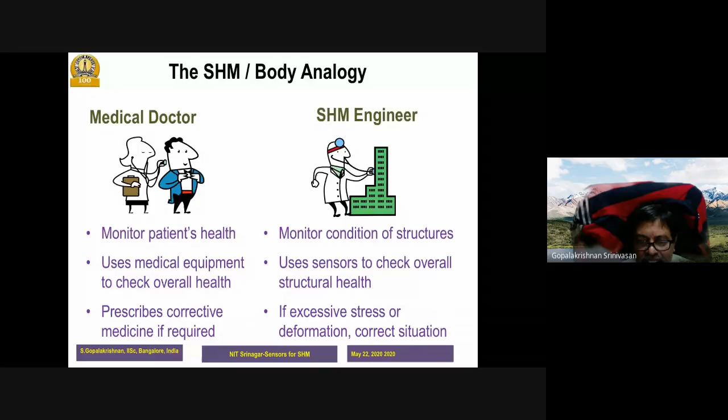And if there is excessive stress or deformation, because of which cracks will form, we will prescribe some corrective actions and do some repairs if possible, or change the structure, change the monitoring condition, change the stiffness of the structure, do whatever to actually see that the structure is safe through its life.

So why do we need SHM? When did this all start? Essentially, if you look at it, they started way back in 1969 when at the Wright-Patterson aircraft base in US, they had a problem where the left wing was lost at low training flight. And when they examined it, they found that there was a flaw in the left wing of the size 1 into 0.2 inch, which was undetected during their NDE examination.

Because of that, the left wing was lost. And at that time, the Air Force mandated that they introduce a new MIL class standard that says you need to have a monitoring system that demonstrates 90% probability of detection and 95% confidence level for 0.05 inch flaw. This was mandated in MIL A83444.

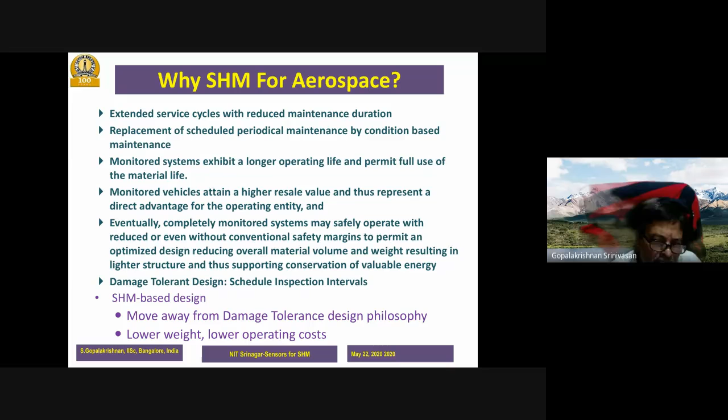But if you go to SHM-based technology, we can actually have leaner, lighter weight, more endurance structures. More endurance means today we can fly from Bangalore to San Francisco without any stop. It should be able to tolerate damage. Today we don't, because we are always afraid of damage occurring. We are very far off, but at least now we are implementing damage tolerant design so that we can regularly monitor the aircraft after a certain number of flights.

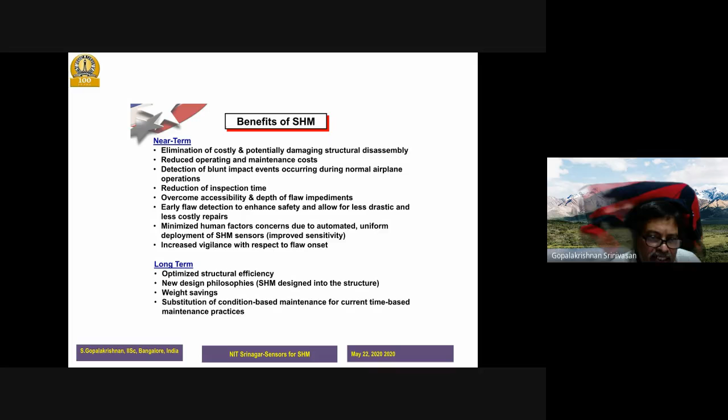So these are the near-term and long-term benefits. I've already talked about many of these things: elimination of costly and potentially damaging structural disassembly, we don't have to do that. We need reducing inspection time, so that's where maintenance comes into picture. Minimize human factors—many times NDE people are so fatigued looking at each and every part that they miss out certain flaws during normal inspection. So we need to automate it, and SHM is a way to do that.

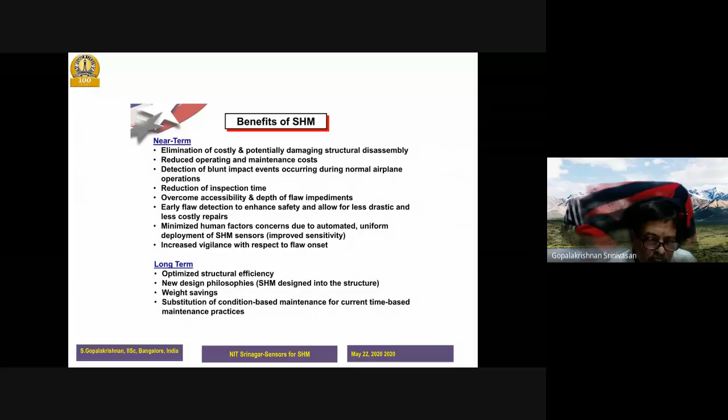In the long term, we need a new design philosophy, weight saving, and eventually move from schedule-based maintenance to condition-based maintenance.

So now the question is, what is the difference between non-destructive test or inspection and health monitoring? Non-destructive test is a subset of health monitoring, but they are not health monitoring by themselves. Why? If you look at the definition, NDI is basically examination of a material to determine geometry, damage, or composition using technology that does not affect its future usefulness. But it involves a high degree of human interaction, and that is where fatigue sets in. It is very local and focused inspection on smaller areas, not on the global level, and requires access to the area of interest. Many times you don't have access—very, very difficult to get.

However, SHM basically uses smart concepts, and it needs NDI, but not in the local sense. The goal is the global sense, to reduce operational cost, and it has potential to automate this inspection process.

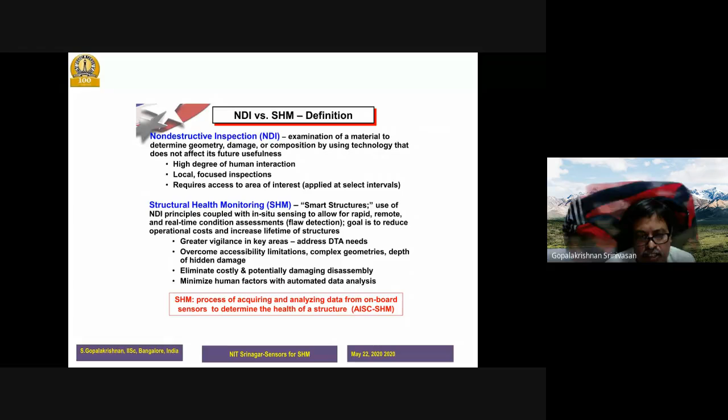So I'll come back to offline SHM—why do we need it? This is a typical graph of a Boeing 737 aircraft. If you look at it, the total inspection cost, 49% of the maintenance cost goes on inspection, just to check point by point. The lower graph shows how much each of the subsystems of the aircraft takes in inspection. Quite a few—my objective is to reduce this 49% to say 15%. That means I am reducing about 35% of the total maintenance.

If you look at commercial aircraft, they bring it to the hangar after every 100 flights. They remove part by part, inspect it, do NDI inspection, and assemble it back. So clearly about 15 days of time is lost, more depending upon the size of the aircraft. For example, the Airbus A380 type bigger composite aircraft takes much more time. So if we can reduce by 35%, this will translate into billions of dollars for the aircraft industry.

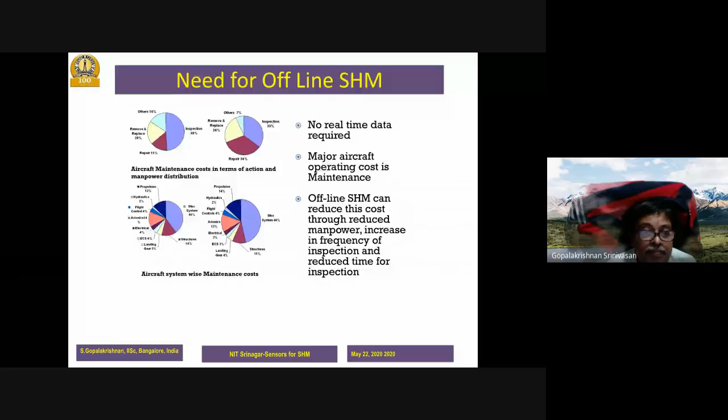And that is where SHM comes in—it's very important. So there are levels of SHM, there are 5 levels. The first level is whether there is damage or not in the entire aircraft. Imagine a big aircraft—how can we say there is damage first? That's the most difficult thing, and it is very small compared to level 2.

Once you find the damage, where is it found and what is the level—is it more or less? Where I can trigger certain maintenance activity at level 2 itself.

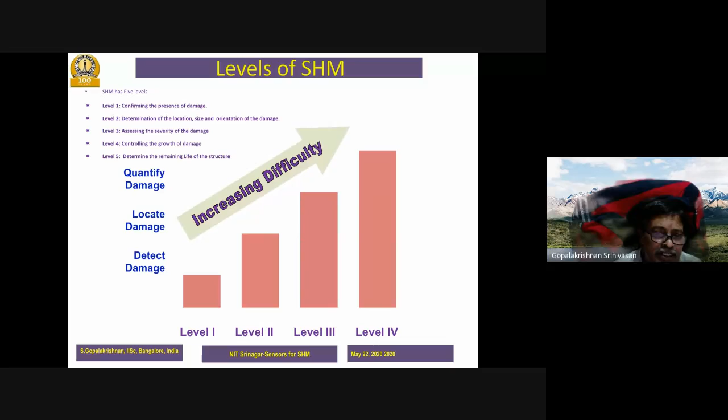To trigger maintenance at level 2, you need to know how severe the damage is. So we bring in the fracture mechanics concept. Is the crack growing very fast? How fast is it going? Once I know that, I can say this is very small, and before it reaches the threshold value given by the design specification, I can do some repair technology at level 4.

After doing that, because the structure was originally designed for a certain life, say about 20 years, and because of this damage the life might come down to about 18 or 17 years, we need to find out how much remaining damage life there is. So all these 4 levels are of increasing difficulty. The first itself is too difficult, and if you go on, it becomes extremely difficult. To do that, we need SHM technology. So this is the level of increasing complexity you are trying to handle.

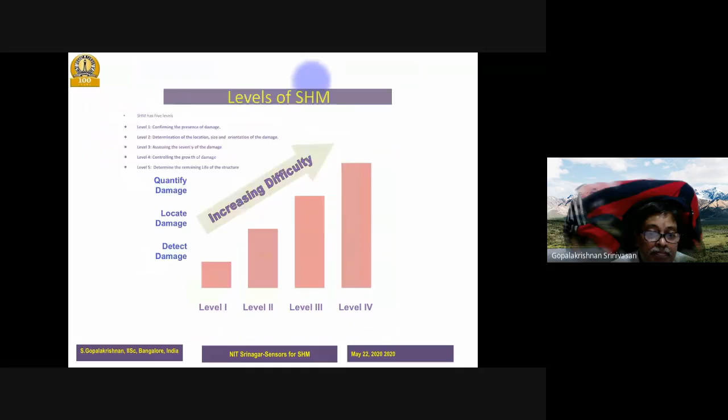From my introduction, health monitoring comprises 4 different areas. One is condition-based monitoring. In this, what will you measure to find out what is happening to the structure? You can measure voltage, current, velocities, temperature, pressure, name it - it depends on the structure and the operational condition. That is what parameters you're going to measure.

But all of this will not be sufficient unless we have very good modeling methods. The modeling methods could be for different damage models. The damage scenario is different for metals, composites, or different kinds of structures at the macro level, micro level, which requires extensive data. And then we need new techniques based on the current scenario, like artificial intelligence, deep learning, machine learning techniques, new signal processing methods, etc. So all of this forms the modeling method.

If you look at the whole health monitoring as an entity, it is a multidisciplinary assignment. It requires knowledge of mechanics, mechanical engineering, materials, electronics, and mathematics and signal processing. So it's a multidisciplinary entity if you really want to encompass all areas of health monitoring. Here I'm going to just talk about one area: sensor technology. This is only one small part of this big circle.

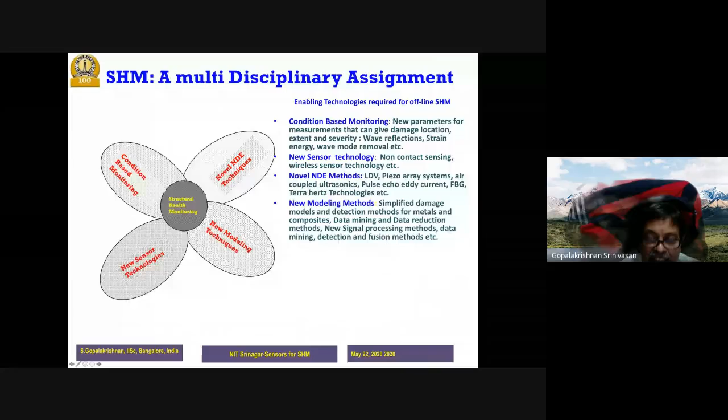So what are the common flaws in metallic and composite structures? In metals, we have cracks, holes, notches, and corrosion. Corrosion is very, very important. We should be able to detect all of this.

In composites, it's even more complex. You will have delamination between the two laminates. The fibers can break, the matrix can crack, and now you have new composite manufacturing methodology like co-cured, co-bonded structures, where the stiffener and skin are manufactured together. Because of this, it becomes like a stress riser, and there will be debonds between skin and stiffener. Composites can absorb moisture and degrade, so material properties degrade, and this happens not in all regions - in some regions we should be able to identify degradation.

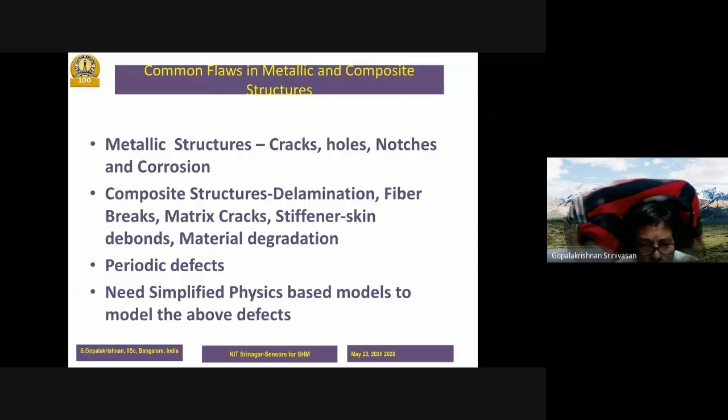Some defects are periodic, like rivet holes. There will be a series of rivet holes in aircraft, and these rivet holes will start when you bolt it - corrosion will occur around them, which will start actually deteriorating the structure. So all of these are very, very important.

Most importantly, impact damages. For example, even when people are doing regular maintenance, if a hammer falls on a composite, there will be a dent, which will cause delamination. That is called BVID - barely visible impact damage. That will create a lot of problems in maintenance, and some of these things I have already talked about.

So if you want to design a health monitoring system for detection of all these damages I talked about, these are the criteria given based on certain mil standards discussed earlier. The design should be able to detect 1 to 2 mm cracks in aluminum sheet, 5 mm cracks in a metallic frame, delamination in composites, or a 100 mm crack in a large area.

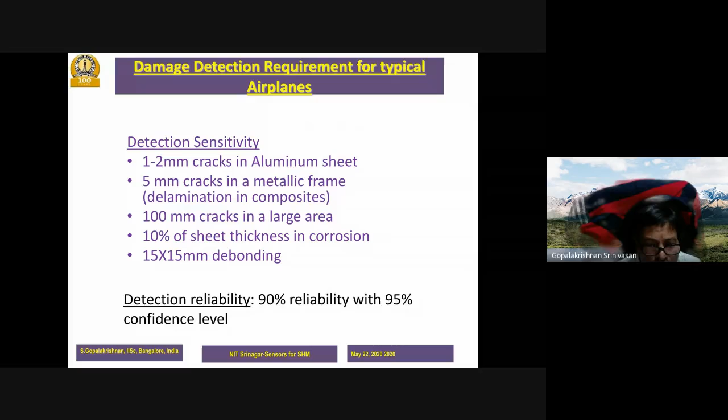All of this should be repeatable and robust, with 90% reliability at a 95% confidence level. We are not yet at this kind of reliability for online health monitoring, but offline, we can realize this reliability very efficiently.

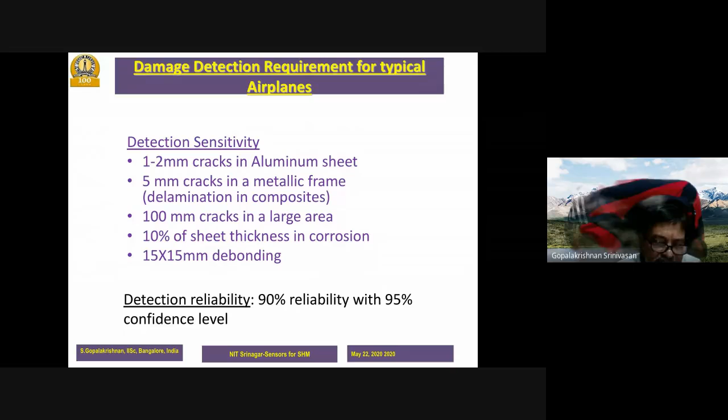Let's talk about programs in India. Our own LCA is mostly a composite aircraft. We have the ALH helicopter manufactured by HAL, which is an all-composite helicopter. We have the reusable launch vehicle from ISRO, which uses extensive composites where these SHM techniques are required. Many engine manufacturers have engines with both a hot section and a cold section, and the cold sections are mostly made from composite, where this SHM technology is needed.

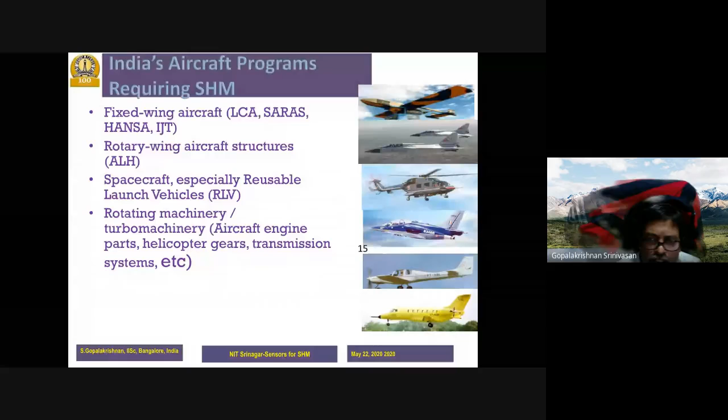So let's come to the different sensor technologies currently being used by the aircraft industry.

What is the major sensing principle? You trigger a signal, you acquire a signal, and from this triggering and acquiring, you extract some signature that is completely different between a healthy structure and a damaged structure. Using this signature, we infer the state of the structure. That's the simple principle, and the response could be static, time dependent, or dynamic.

The type of signature depends on the type of structure on which SHM is mounted, the operating environment, and environmental conditions. The variables you measure depend on the type of structure and type of SHM. You could monitor frequency, wavelength, voltage, current, impedance, electrical resistance, vacuum pressure, strain gauges, Doppler shift, and so on, depending on what kind of NDE equipment you use to measure it. I'll talk about a little bit of this, not all of it, but some of it here.

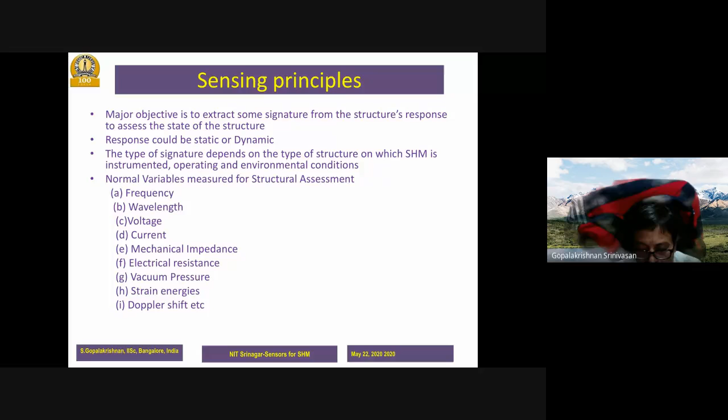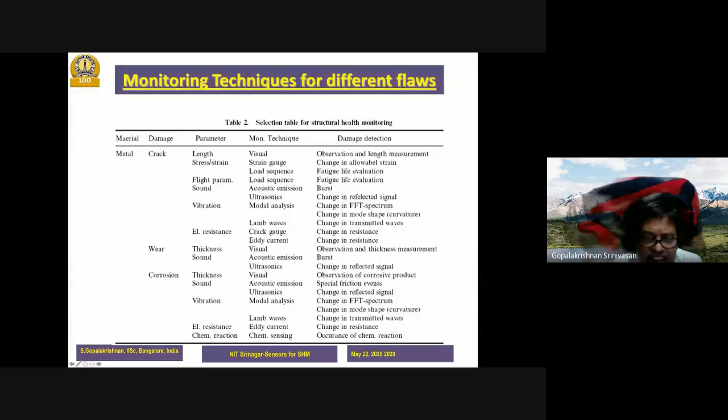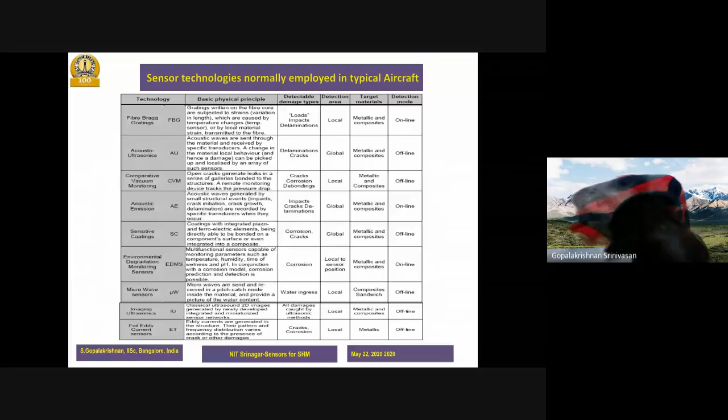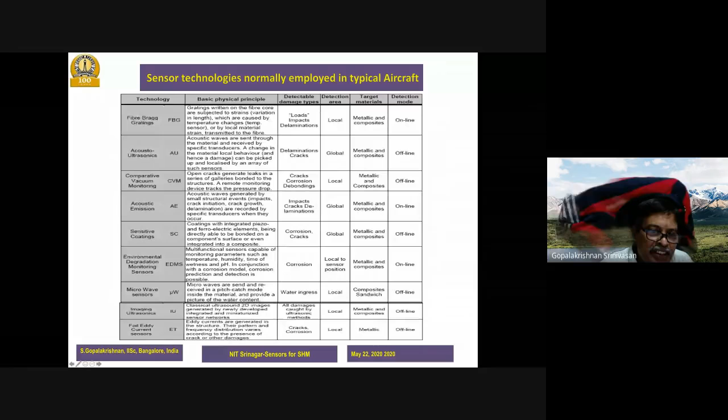If you look at the sensor technology normally employed in typical aircraft, this is a slide taken from Airbus. All this technology I mentioned previously, like FBG, acoustic ultrasonic, CVM, etc., I'll come back to the principles later. What types are they monitoring? FBG is mostly used to monitor loads and delamination, acousto-ultrasonics for delamination and cracks, CVM for corrosion, etc.

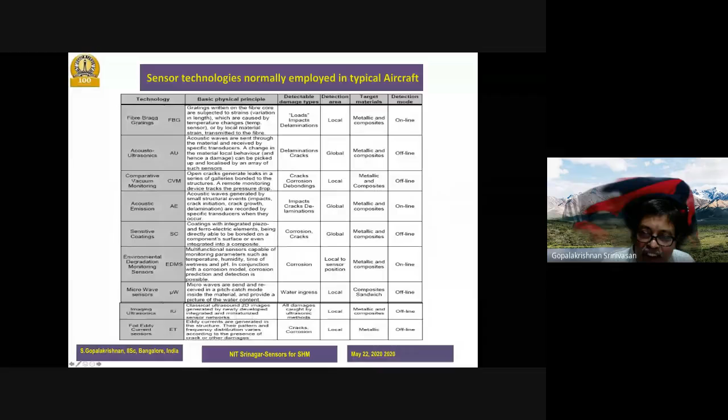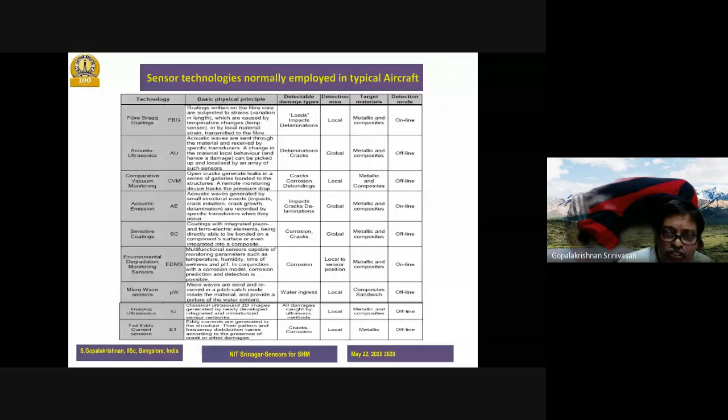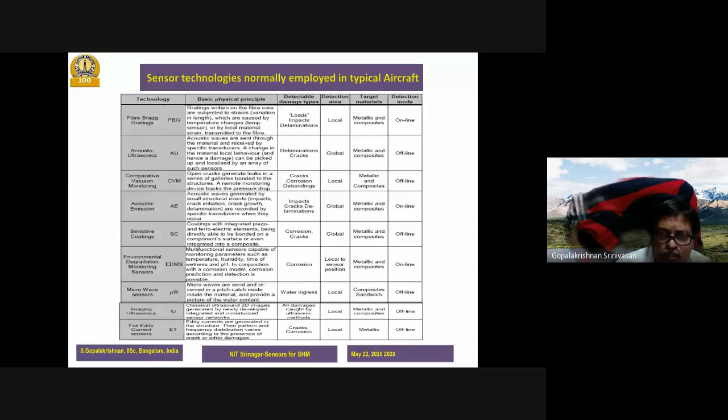If you see the last column, almost everything is offline, meaning it's not taken when the aircraft is flying. When flying, they just monitor the loads. How? When load levels increase, you feel turbulence, because there's a load monitoring system that indicates the level of turbulence, and that is what the pilot announces. Except for online load monitoring, most of it is offline because we still haven't got the confidence level to monitor these defects online.

So what are the conventional sensors? One very useful sensor is comparative vacuum monitoring. It works on a simple principle. When the aircraft is manufactured, they do theoretical analysis like finite element analysis to find regions of very high stress for some design loads, and they build a vacuum system into it at manufacturing time. So when the aircraft comes back to the hangar or terminal, they connect this vacuum creation instrumentation and monitor the pressure.

If there's no pressure loss, that means there's no crack, since vacuum is zero pressure. When I have zero pressure, no crack is there. But when the pressure is not zero, that means something is happening in that area, and it requires an NDE examination. This is a very simple method—you don't need any time data. You have equipment, you measure the pressures due to vacuum, and if the pressure difference is large, a crack is certainly detected there, requiring remedial actions.

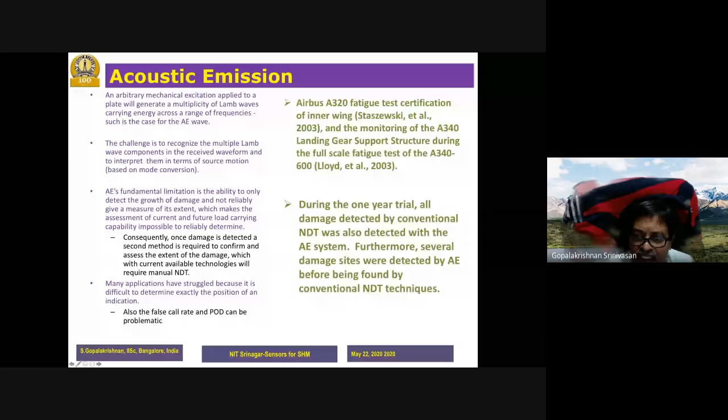That's one of the greatest disadvantages. However, they have used this for a variety of applications. In Airbus A320, the fatigue test certification was done using acoustic emission, and during one year, all damage detected by conventional NDT was also detected by the AE system. Furthermore, several damage sites were detected by AE before being found by conventional NDT. So this is a very robust method, but you need to work it alongside another method to confirm the results.

The other one is the more latest one that is used, a PZT. PZT stands for piezoelectric material - P stands for lead, zirconate, titanate. It's a material which can act like a sensor and actuator.

This new technology was made at Stanford by a group headed by Professor Fu-Kuo Chang, who has got a company called Acellent Technologies. They made a fabric, a patented product, where they have got a number of PZT sensors embedded into this fabric. So whichever structure you want to monitor, you paste this fabric onto the structure so that it is firmly built into one over the another.

The advantage is each of these sensors can be triggered as a sensor and you can measure it. Each one is done successively over a small region, and using a triangulation method, they find out the structural flaws. Many of the US Air Force and Navy people in the US have used this technology now for flaw detection. It's been extremely popular, and they have come out with various new technologies to do this.

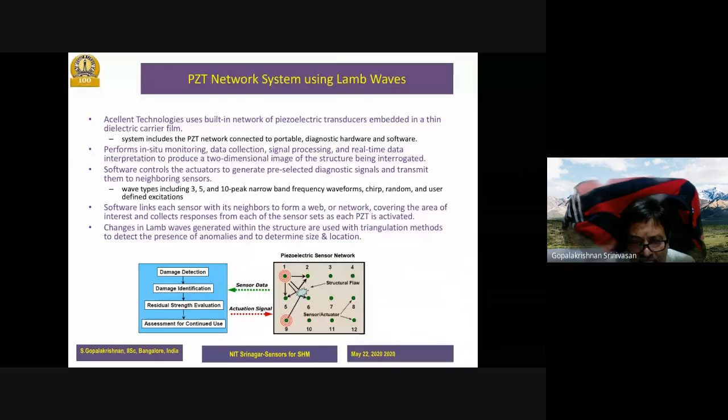But the fundamental thing is this new fabric they have put, which can bond on the structure, and the bonding is so perfect that you can actually infer what is happening to the structure based on the triangulation of the responses that are triggered from this piezo actuator.

The next sensor is the fiber optic sensors. This is very useful in aircraft because aircraft has a lot of electromagnetic interference, which affects other sensors such as magnetic sensors and electric sensors, reducing their efficiency. This is very, very ideal in the aircraft situation because fiber optics is immune to electromagnetic interference.

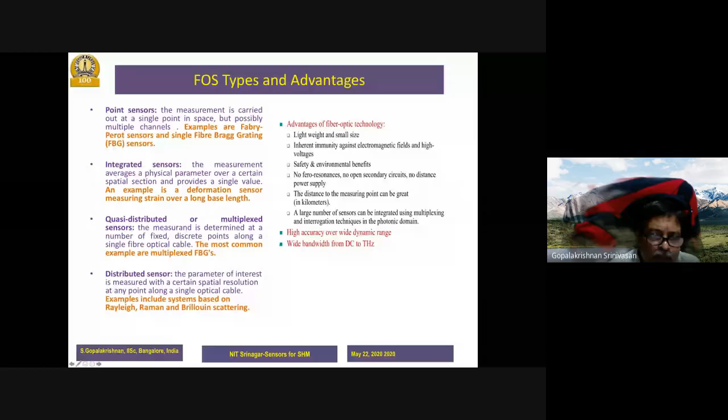There are different types of fiber optic sensors: point sensors, integrated sensors, quasi-distributed sensors. But the most common thing about it is the point sensors based on what is called FBG, the fiber Bragg grating, and that's what I'll talk about in the next slide. That's very, very commonly used in aircraft applications.

So what is this FBG sensor? You have an optical fiber running through the structure, so you can actually embed that in a composite structure and you grate it. Each of these gratings is a sensor.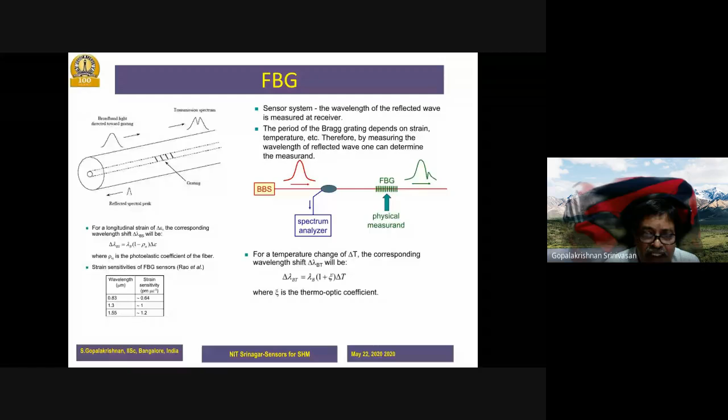The other one is acousto-ultrasonics. This technique sends an acoustic wave into the structure and intercepts them when they emerge from the other side of the damage. So on one side of the damage, there are two sensors, one before and one after. It is like pitch-catch mode - you pitch it at one point and catch it at the other point. If there is a deviation in the input signal, then you infer that there is damage there. Some of these techniques are already used by Airbus in their aircraft, as I mentioned.

Finally, the last sensor I'm going to talk about on general sensing is the eddy current sensor, which works mostly on the surface based on magnetostriction. Basically, the current passes through the magnetic circuits and changes the magnetic field if there is damage in the structure, on the surface of the structure. But the disadvantage here is this cannot monitor effectively if the damage is embedded inside the structure. For example, in a laminate, you have a number of different lamina stacked together. If there is a delamination at, say, the fifth interface, you cannot monitor it from the surface, mainly because the eddy current will not penetrate that deep.

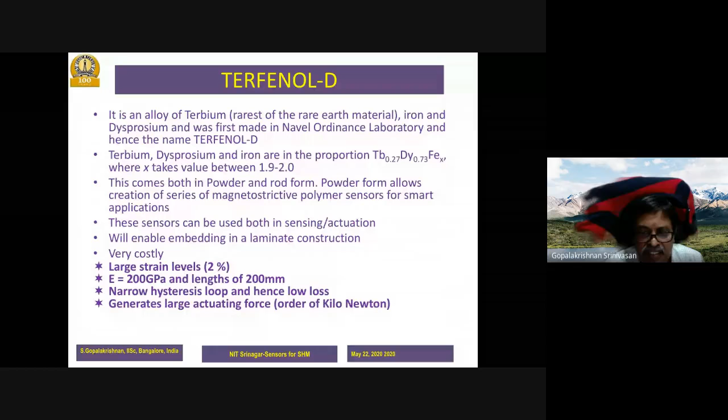These sensors can be used both for sensing and actuation, and they enable embedding into laminate construction. But it is very costly — one gram of Terfenol is equal to eight times the cost of gold. That cost can be somewhat justified because it has large strain, meaning it can generate large block force — kilonewtons of force through actuation.

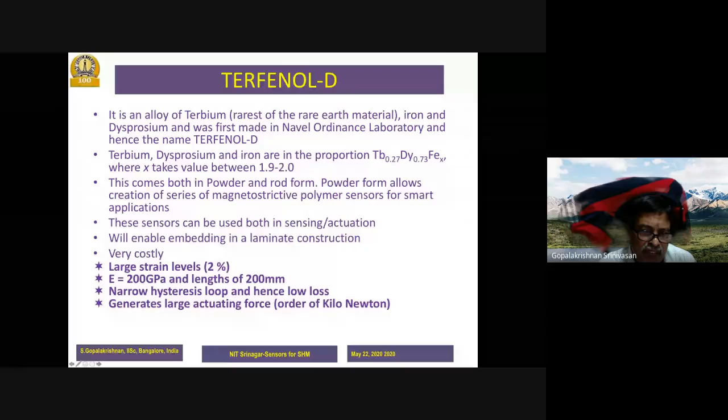Initially, when this material was made at the Naval Ordnance Laboratory, it was thought of as an actuation material. It has a narrow hysteresis loop compared to piezoelectric material, hence the loss is very low. However, it is heavy in weight. It has stiffness as high as steel, about 200 GPa, and it can come in lengths of up to 200 millimeters.

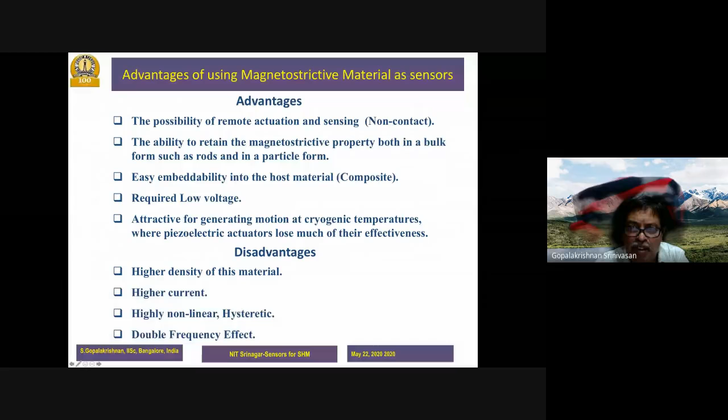So I have told you the advantages and disadvantages already. It requires very low voltage, it can be embedded, and it retains the magnetostrictive property both in bulk form and in particle form. The disadvantages are that it has higher density, so it is heavy. It requires high current, low voltage, is highly nonlinear, and because of this nonlinearity it has a double frequency effect. And, of course, it's very costly.

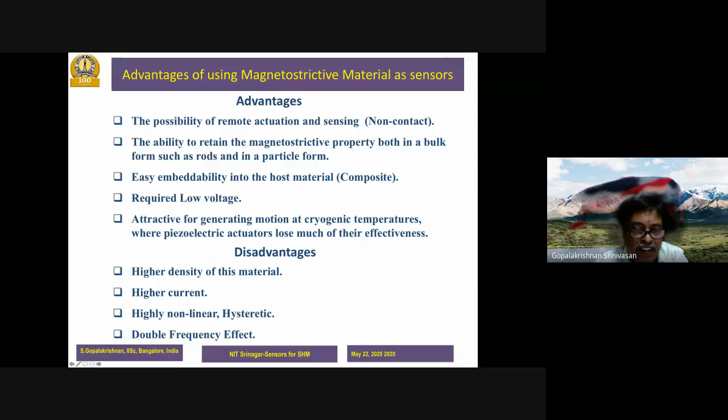If you look at the constitutive model, the strain is related to stress and also to the magnetic field. D transpose H is called the Maxwell stress, coming from Maxwell's equation. This is the elasticity equation: the strain is related to stress as well as magnetic field, and the magnetic flux is related to mechanical stress and magnetic field through permeability. Here, the compliance — the material property — is measured at constant magnetic field.

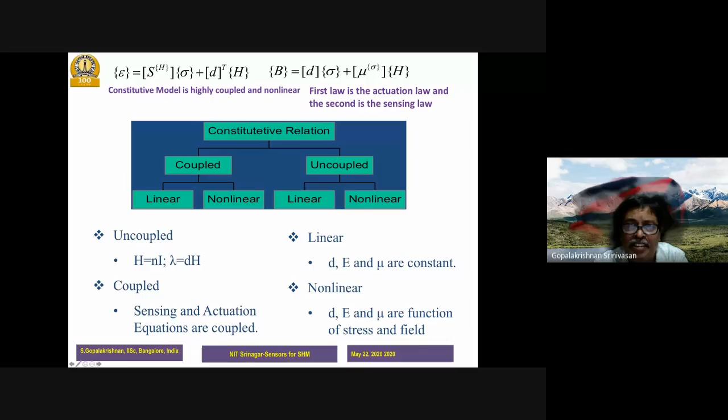And the magnetic flux is related to this constant stress, with permeability measured accordingly. So these equations are highly coupled. When you change H, as the strain changes, the stress changes; when the stress changes, the permeability changes. So you just cannot uncouple this equation. That is where most people use an uncoupled equation, assuming the magnetic field is directly proportional to the current using the number of coils. This is actually a somewhat wrong assumption.

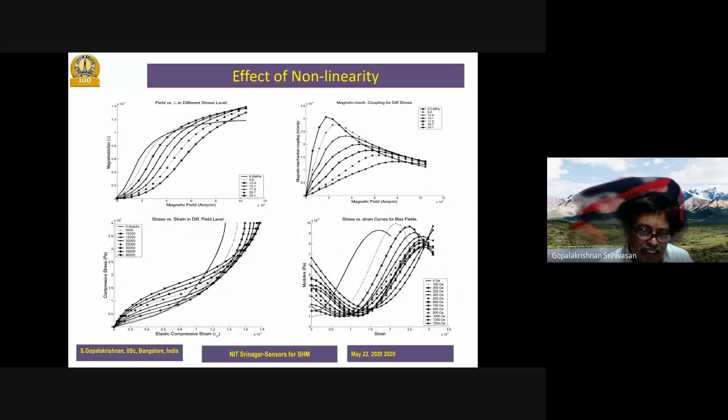Even the magnetostriction changes with different stress levels, and only manufacturers give you certain things. If you want to design a sensor, we need to have a robust method to estimate it. So what we did here is...

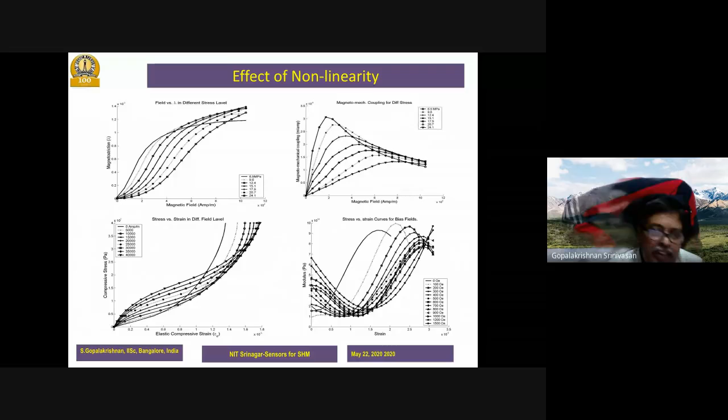We did a couple of numerical approaches. We actually assumed the magnetostriction as a polynomial function of magnetic field, and these constants were determined. So we took up to 4th order polynomial, and we determined based on the manufacturer data, so that once I have this equation, whenever I feed any magnetic field, I should get magnetostriction. From magnetostriction, I will get the stress strain levels, I can get everything.

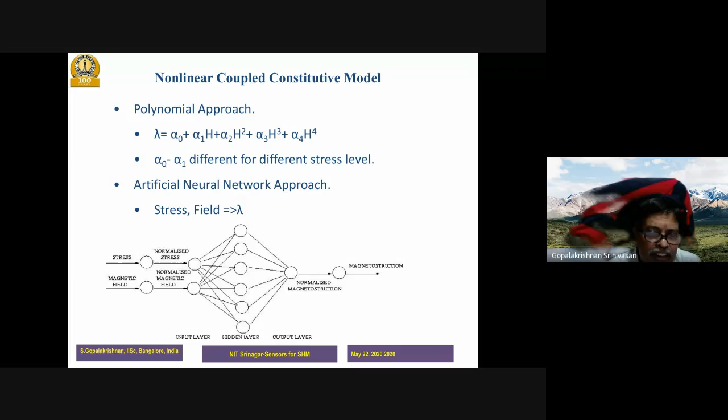And the second method is we created an artificial neural network where the stress levels given by manufacturer were fed, and the magnetostriction was determined as an output using a multi-layer network. And with both methods, we have now got it so that for any magnetic field, I can get the magnetostriction using these two approaches.

I'm not going into the theoretical formulation of it. I want to keep the equations to the minimum, but I want to show that we have done this.

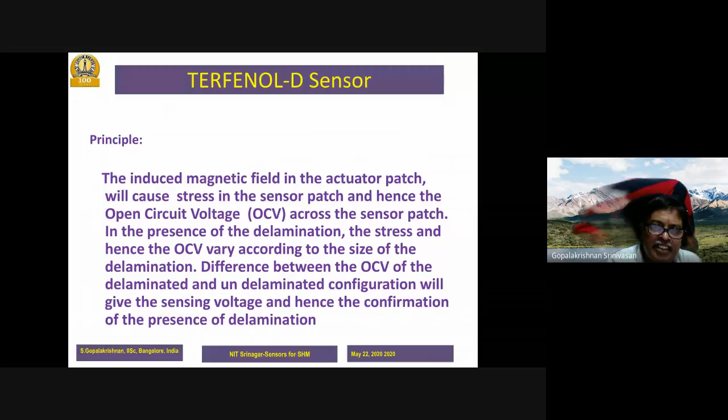So then, once we actually got this model, we wanted to test it experimentally. We bought Terfenol-D rods, powdered it in an inert atmosphere, mixed it with epoxy, created a magnetostrictive patch, and then embedded them in an 8-ply laminate composite. And then we induced the damages, wanting to find whether our method and my model give exact results.

The principle here is that the magnetic field induced in the actuator patch will cause a stress in the sensor patch, and hence the open circuit voltage changes. If the open circuit voltage doesn't change, then there is no damage. If it changes, it indicates the presence of a delamination or a crack. And using this, we can quantify the level of damage that is there.

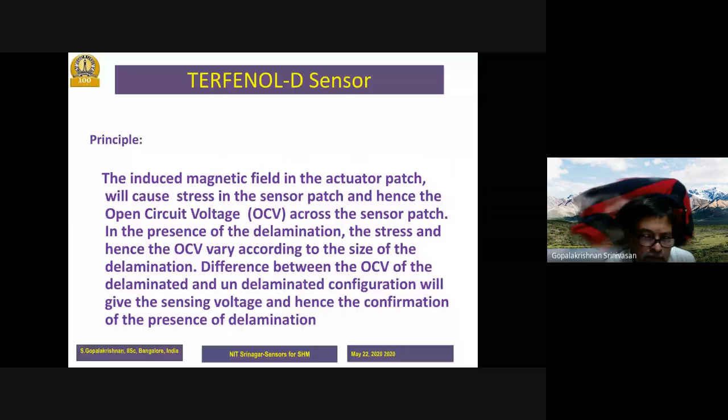So this is how we made it. We took an 8-layer, 8-ply laminate, then made a cutout for this patch in the laminate. We fabricated the patch by mixing the epoxy with the material, then used a magnet to pull this magnetostrictive material, took the leads out, put this patch in the middle of the laminate, and then fabricated it using our autoclave process.

Once we do this, we have a magnetostrictive sensor embedded laminated composite. And this is the schematic. So we used a horseshoe system with a number of coils to induce the magnetic field, which passes into it. This is used as an actuator coil, and this is used as a sensor coil.

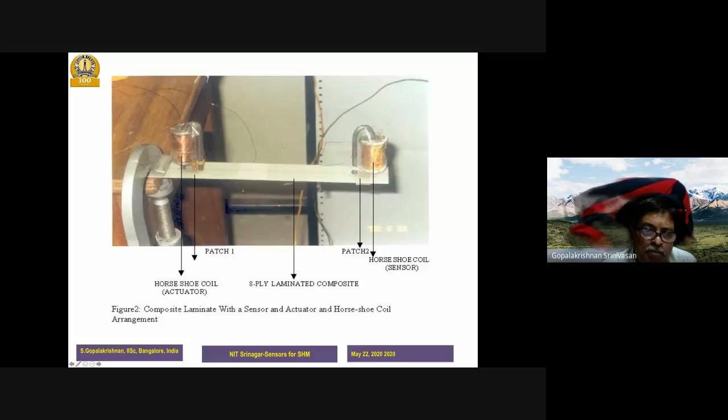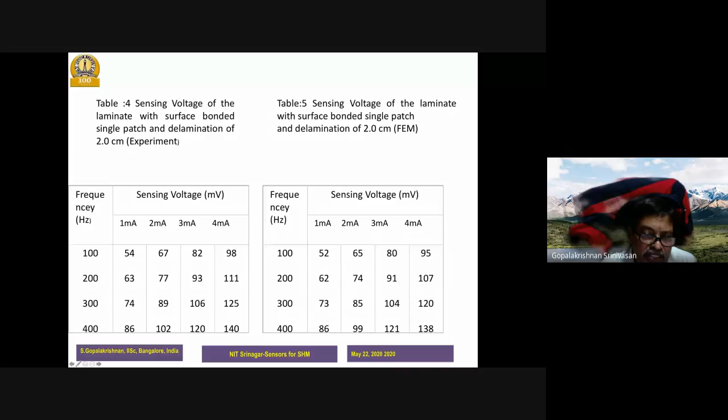When we trigger the signal, it is an AC sine voltage, I equals I naught sine omega t, where omega varies from 100 to 400 hertz, and I naught varies from 1 milliampere to 4 milliamperes. And we were able to measure the voltage, getting very good agreement between my numerical model, finite element model, and the experiments.

So the last topic I'm going to talk about is the laser Doppler vibrometer. This is non-contact. All of what I talked about before is contact sensing, where you need embedded leads connected externally to some NDI system to measure certain quantities to infer what is going on.

In this laser Doppler vibrometer, we don't have any contact. We just shoot the laser, get the response, and find out what is going on. That is very useful in aerospace, because in an aircraft you have kilometers of wires running around for monitoring many things, and we don't want to put one more thing there. So non-contact sensing is very useful.

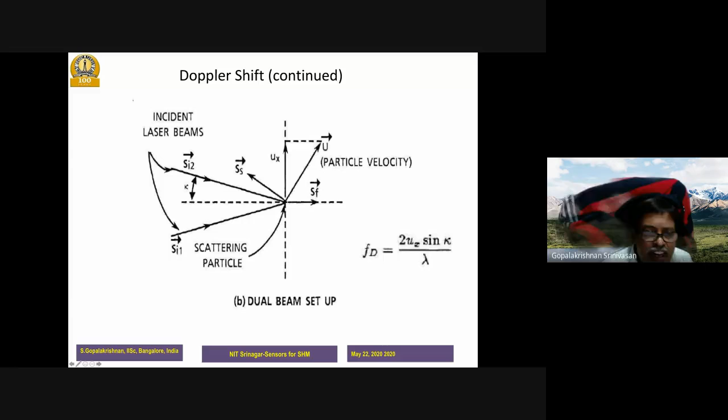So the principle is: when a beam falls onto the vibrating structure, the Doppler shift happens, directly related to lambda, and this is converted into velocity time history, giving you every pixel point that you have.

So to see that, this is the vibrometer we have in our lab. This is the component, the distance is about 10 feet. This is the vibrating head, and there is a data acquisition system here. There is a PZT actuator which will vibrate the structure, and the head will point out a laser, and you have a laser camera here. So you choose the area where you want to monitor.

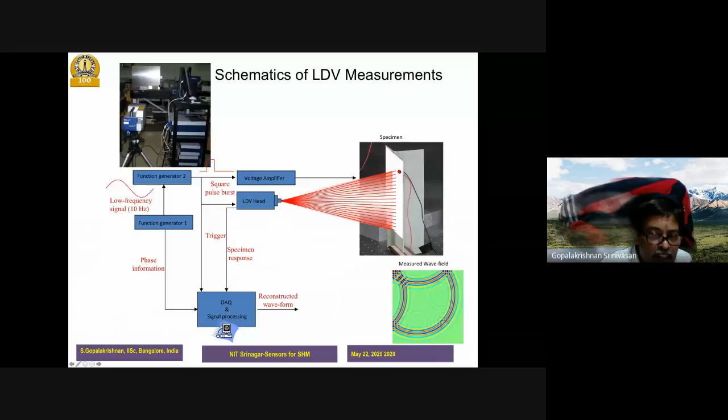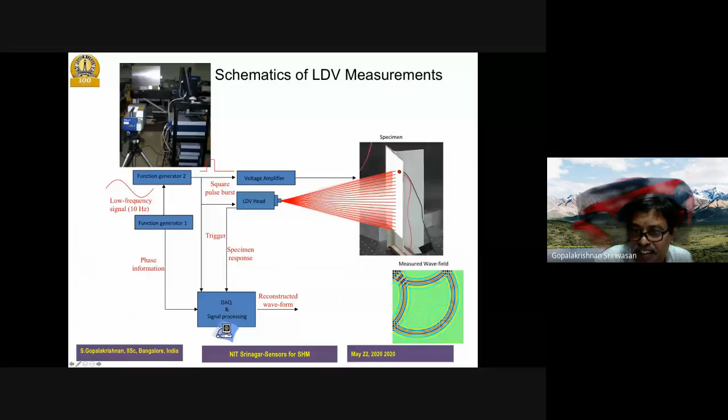That area is pixelized, and at each pixel point you get the response, giving you a seamless response all over. You can use techniques to pinpoint exactly where you need. So this is the principle: you have a function generator, a laser head, a piezoelectric element that points, and the complete wave field is measured.

So this is the region I mentioned. The camera chooses the region where you want, and each region is pixelized, so at every pixel point I get a measurement. Here is a T-pull joint, which is a co-cured, co-bonded joint with a skin and a stiffener. I trigger the piezo actuator on the skin, take measurements on the skin, and infer what is happening on the stiffener. In an area of 4.2 inches, I have 45 pixel points. So imagine I can pixelize much, much finer depending upon my grid size.

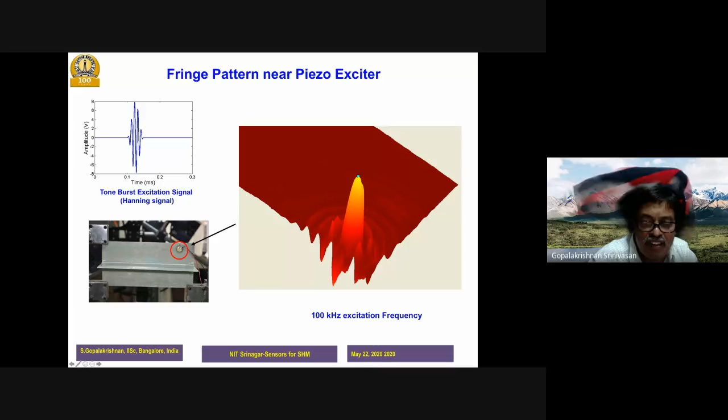So this is basically a 100 kilohertz, 5-cycle tone burst signal. And if you look at it, this is how it comes. You see, this is the flange-web interface at this time, and it interacts with the delamination at this point. And you can easily see there is mode coupling happening, easily visible.

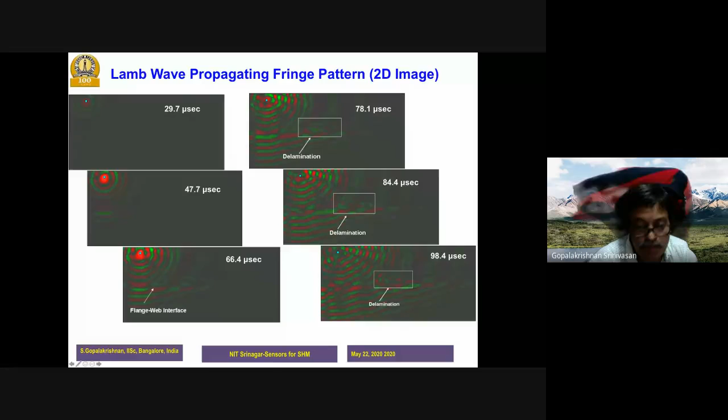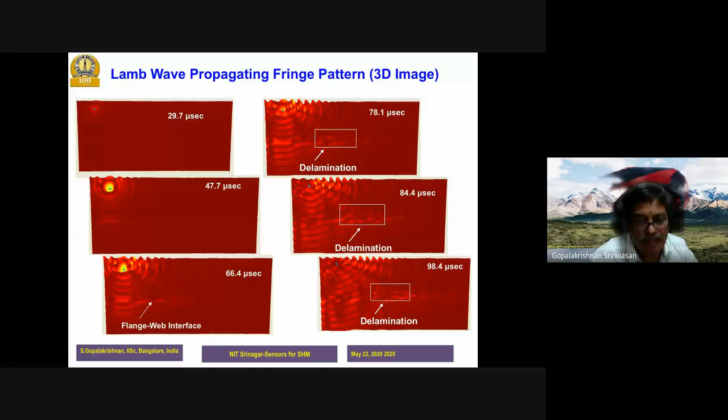This is taken from only one head. This is taken from 3 heads, 3 laser heads, and the delamination is much more clearly visible on the same pattern and the same sample.

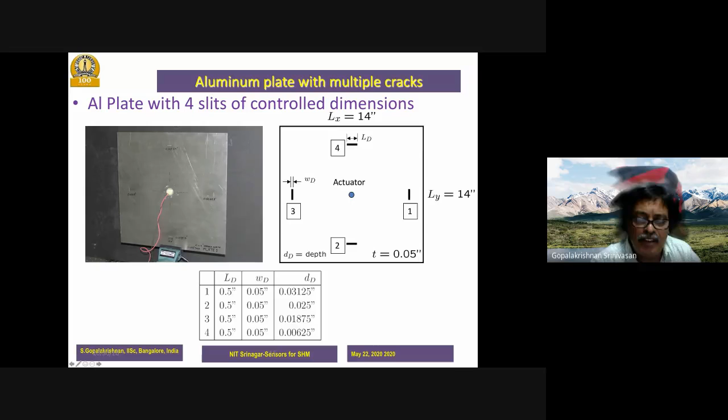To demonstrate it more intensely, we have a very large aluminum plate. We made different cuts here: 0.03, 0.00625, 0.01, 0.025. And we chose to monitor only small regions close to this crack to see what this vibrometer gives. And this is the length of the crack, you can see.

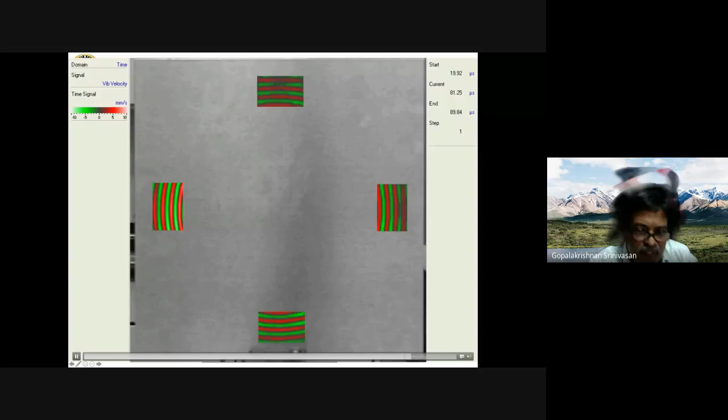So here we need further algorithms based on this to find out, and we have developed a series of algorithms here. So if you see that, you could see the regions where I was using our RMS filtered response and damage index. We can actually figure out where the crack is and what its size is, very accurately.

Then finally, we wanted to take it to the real aircraft. So we went to an Air Force base in the US. This work was done in collaboration with Georgia Tech, so some of the algorithms were developed by me, instrumentation from there. We actually did this on an F-18 aircraft during regular maintenance. They gave us access to do this, about 1 hour.

We took this laser head there. We monitored the horizontal wing and the vertical wing. The distance we monitored was about 7 feet. The piezo actuators were there. We acquired the data, brought it back, and saw what was happening there.

So this can be readily implemented. The idea I'm telling is this is not something of theoretical interest. This can really go into practice.

So these are the overall test setup that we used. This is a vertical tail, these were the piezo actuators. It can be mounted on a laser tripod, and then we shot the laser here, vibrated the structure, and got the data. So if you look at this, on the horizontal tail, this is real-time data. When the piezo triggers, I can see how the wave propagates, captured by non-contact means, absolutely no contact.

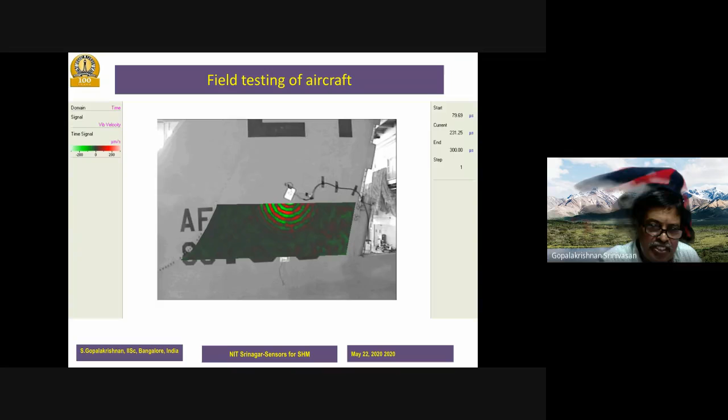There's only contact for triggering the piezoelectric. So we could see something is going on in these regions, something going on in this region. Then we put this back and applied our own algorithms using these velocities, and we can get that. So this is on the vertical tail. We got this another video.

You could see this is a lot more better, this one, using this. There is a clear wave propagation in the vertical tail.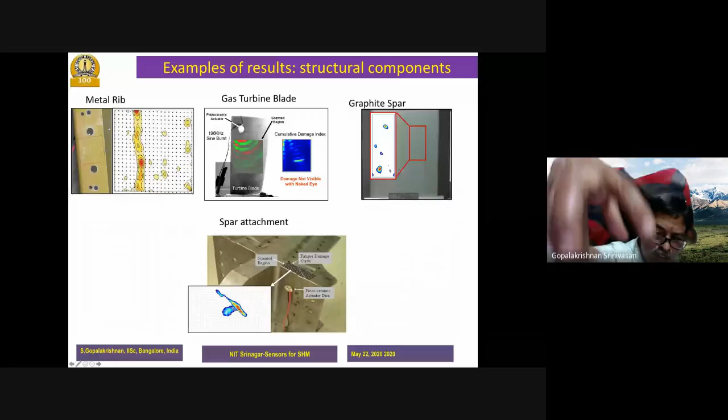And this is the wing spar attachment, where the damage scenario was the laser was put on the top surface, but the vibration was triggered in the other plane.

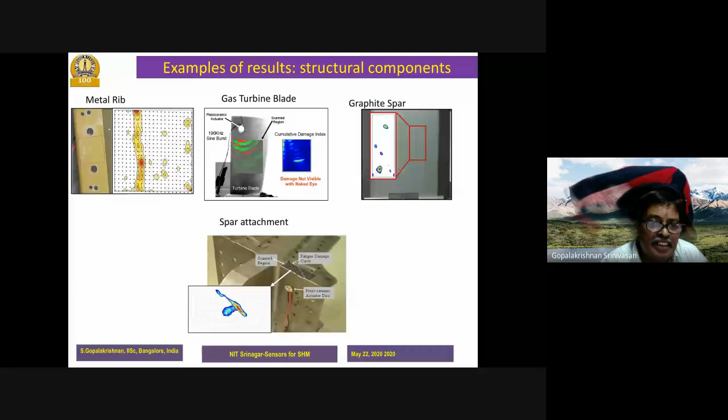Now we have told HAL, and HAL is going to give us a big project on making one of the lasers. Till today, we were using the laser Doppler vibrometer made from a German company, which is very expensive. So we want to indigenize in India at least a fraction of the cost. HAL is now convinced, and they have come back to us to actually use that. They're going to try this technology for it to be used.

So this is my last slide. In summary, we have used a number of sensors. CVM, that is comparative vacuum monitoring, and acoustic emission are the only current sensors used by aerospace companies for SHM purposes. Fiber Bragg grating is a very good potential candidate for online SHM, and some of its implementations have already taken place in load monitoring. Terfenol-D has good potential to be a sensor material, and further developments in reducing the size of the sensor are necessary.

Laser Doppler is a very good candidate for offline health monitoring. It can help move from the current practice of schedule-based maintenance to condition-based maintenance, because one person can do the monitoring of everything without disassembly. That is the great advantage. This alone can translate into billions of dollars for you.

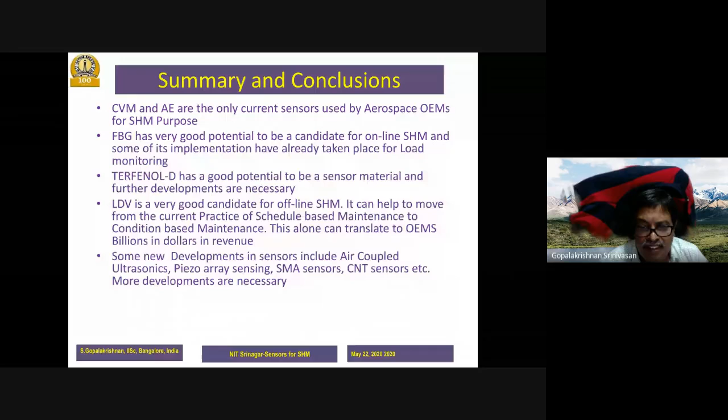There are many new developments taking place in the country. IIT Madras has a very good NDE department where they are making air-coupled ultrasonics, very useful because in the aircraft scenario, most ultrasonics use water as a couplant, but now they've come up with air as a couplant. It's very useful. Piezo array sensing, SMA sensors, CNT sensors—this development is going on and on. Many people are doing it, and now more people are taking a lot of data, but they don't know what to do with it, so they are developing machine learning algorithms to actually make sense of this data, reduce the number of data points to only what is required, and this research process is going to the next level now in health monitoring.

So with this, I will stop. I can take questions. Thank you.

So the session is open for questions. Any question from the audience? Either they didn't understand this, it looks like. Well sir, I have not understood many of the things because they are of a very high level, I would say. Since you have taken us to new heights, maybe the participants are a little hesitant to ask you. Well, I will take the opportunity to get myself and ourselves enlightened by your lectures.

I would say I just want to know what is special about air-coupled ultrasonics. When we speak about ultrasonic testing, we say we need a couplant to transmit the ultrasonic wave into the material, but it's something special we are hearing from you, air-coupled ultrasonics. So would you like to share your views on this?

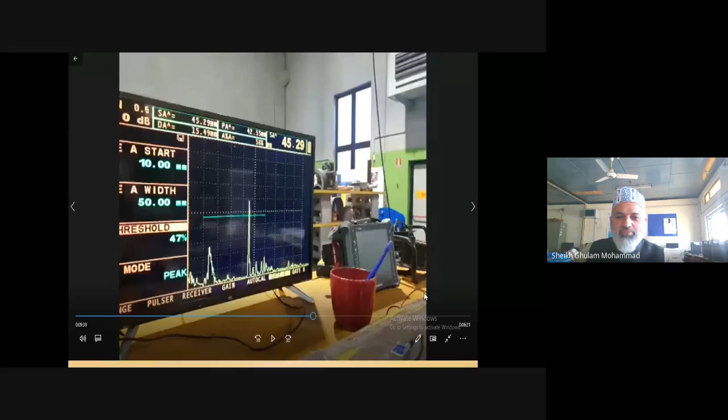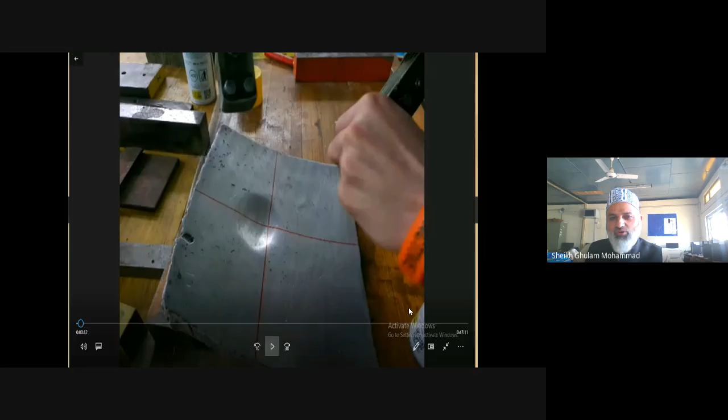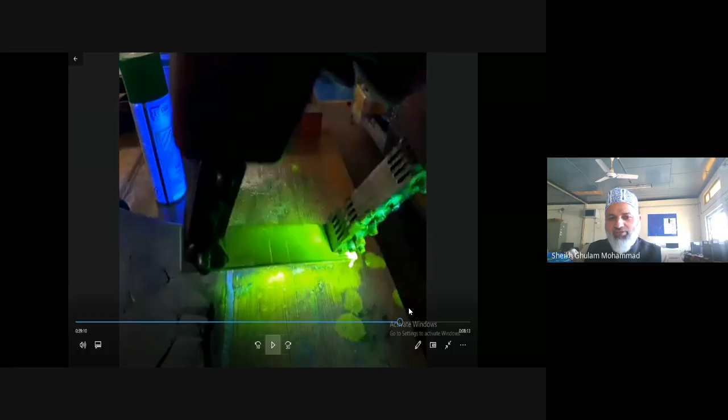See the clarity. Only thing is that in Google Meet, when the participants are more, you cannot see. See the clarity of the piece which was being conducted over there - magnetic particle testing. This is also magnetic particle testing. So these were the snapshots of the videos of the practical session.

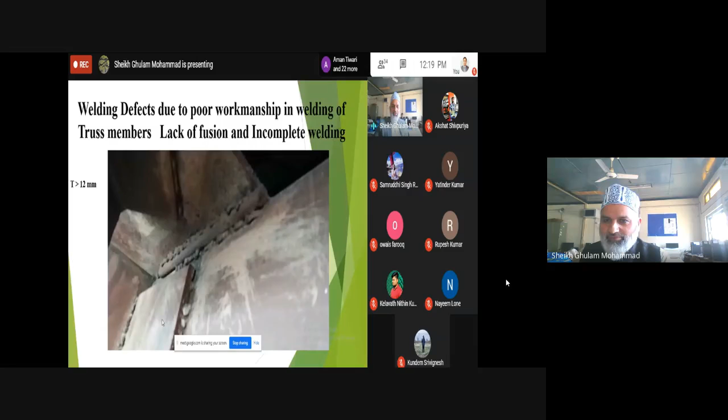So what about our Professor Shahid Saleem? Has he joined? I think he has joined, sir. Well sir, just check it. I told him, he told me he's joining.

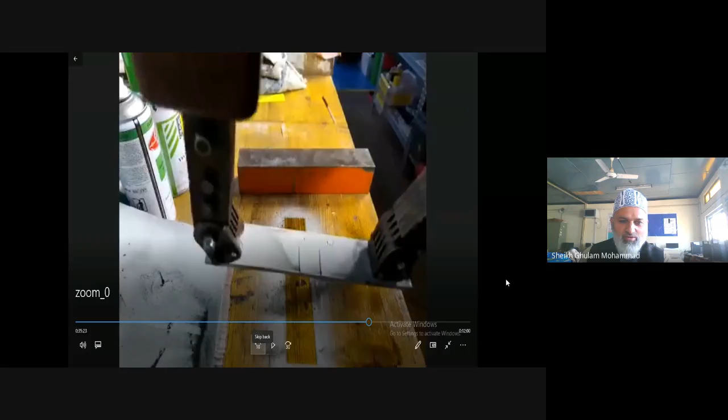We'll be also sharing some e-books after taking permission from Mohammed Murslin. He has shared some 2 good books on NDT also, and we'll be sharing these e-books with the participants. Let me also take permission from Nardoni - I have some books from the American Society of Non-Destructive Testing which he has shared with me. So if I could get permission from him, I would share with some of the students on some specified topics only, not the whole book. Also, one of the students wanted information about acoustic emission testing material, so I am looking to get suitable information for him or her.

Professor Shahid Saleem is a well-known faculty member of NIT Srinagar. There's no need to introduce him, he is known all over at least J&K. Without him, the mechanical engineering department is incomplete. Come on, that's a bit too much.

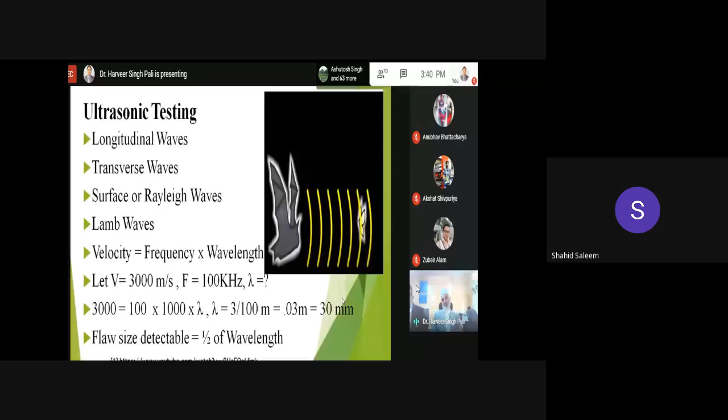Online it's not easy to understand anything too technical, but you need to know the basics behind whether you're looking at ultrasonic testing, dye penetration testing, eddy current testing, or phased array developments. Mostly, if you remember the first class taken by Professor Sheikh Ghulam, it talked about the advances that have taken place in non-destructive testing and evaluation over these years.

The equipment has evolved over time. Somebody might have talked about the maintenance center we currently have, which is now a CRFC center within the department, with the tribology lab housed within it, plus the IT department. It was envisaged with the government of Italy and the government of India to become a maintenance center catering to the needs of the entire northern region of the country, but because of various issues, we were not able to come up to that level.

But we still remember the equipment that had been procured in the 1980s, which was even a decade later still top of the line stuff. People did use it, and Professor Sheikh Ghulam has used a few of those equipments for his non-destructive testing and evaluation work.

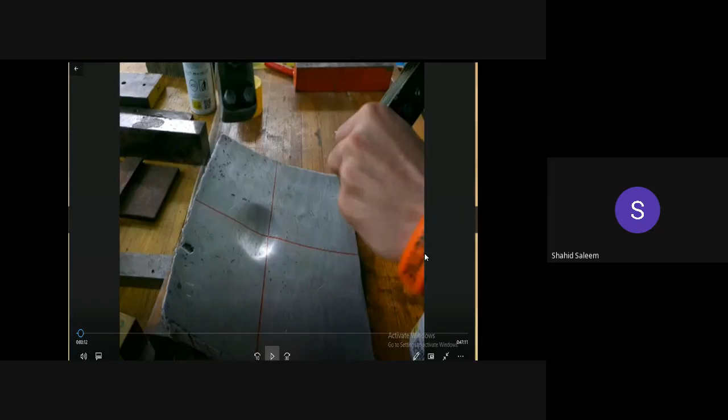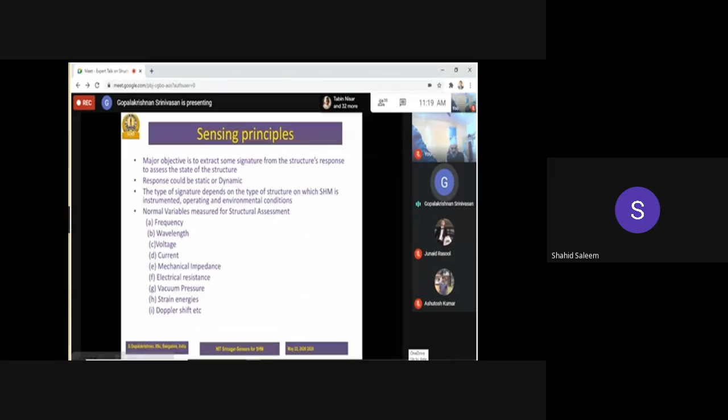So I feel this particular course would have been of great interest and quite beneficial. Even a cursory glance at the course, covering basics, fundamentals, and theory, as well as practical orientation, Professor Gopalakrishnan might have given you a good idea of where you can take these certifications. He himself has done certain certification courses, both online and offline.

So you could build up your resume as well as your engineering skills in any direction you feel - you could go to CFD, additive manufacturing, or NDT. A whole vista of knowledge is available to you, and all of these courses designed by the Department of Mechanical Engineering during these tough times of the COVID pandemic have mostly provided the student community and participants with fruitful, really practical knowledge in all areas of engineering and science.

I wish, as well as congratulate, the mechanical engineering department and the head of department, Professor Sheikh Nazir Ahmed, who was the main driving force behind this course, motivating Dr. Muslim, Dr. Pali, and Dr. Sheikh Ghulam Mohammad to come up with this wonderful course. It was short, yes, but if it has given you a glimpse of the fundamentals of NDT, that would have been a great achievement.